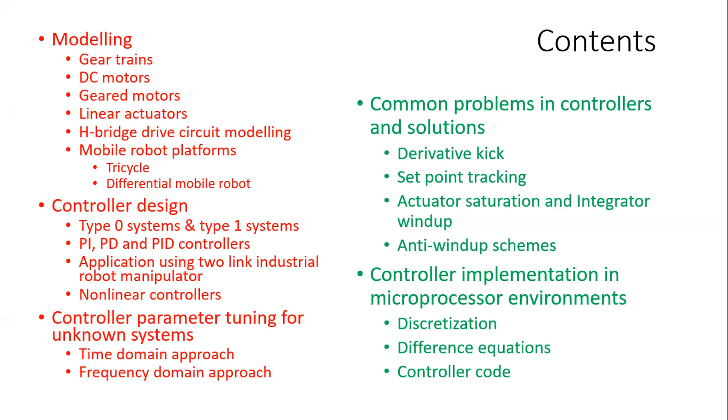Mostly these are DC motors, though sometimes you get stepper motors as well, and they come with a gear train. Why do we put a gear train? Motors are typically high-speed devices, whereas the motion profiles we need are smaller compared to the motor's speed. The motor may run at 1000 RPM, but what you want is 100 RPM or less. So you need a reduction gearbox to do that.

Putting in the reduction gearbox isn't the problem, but how do we incorporate that into the model if we want to control it precisely? I'm focusing not just on simple control, but on a more precise level of control.

Whatever complexity exists inside the gearbox, you have an input and an output. In between, you may have two gear wheels or many gear wheels. Those who have studied mechanical engineering will agree there are many sophisticated gear train arrangements, but whatever it is, it has one input shaft, one output shaft, and a gear ratio. So I'm talking about that kind of simple model, which is good enough.

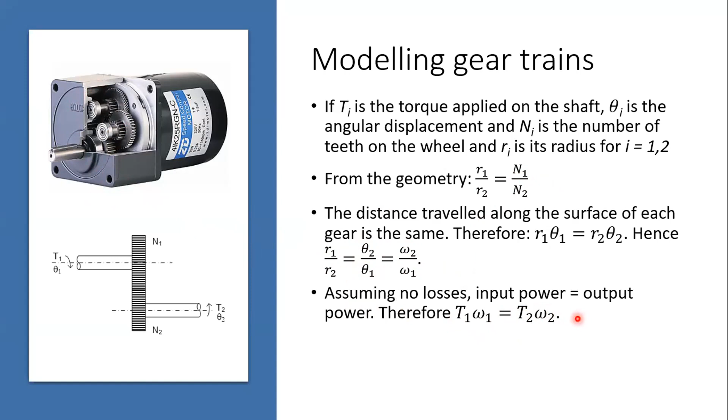In addition, if I assume this block is loss-free, input power—torque into speed—equals output power, again torque into speed. From that I can get the torque relationship. Practically this may not be exactly correct, but for modeling purposes it's accurate enough for us.

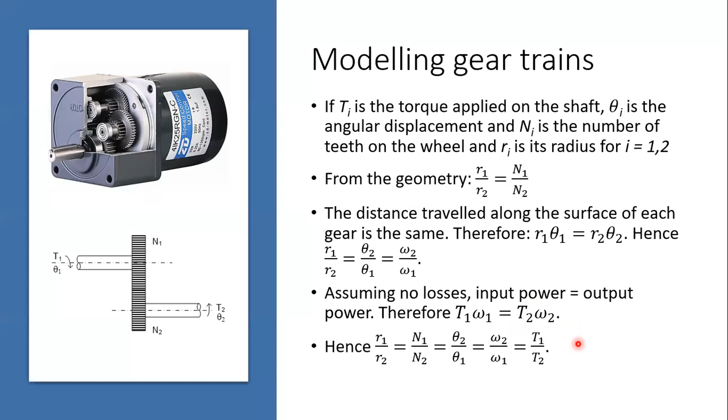So we simply combine these three equations—1, 2, and 3—into one long equation, which will be used for the modeling purpose.

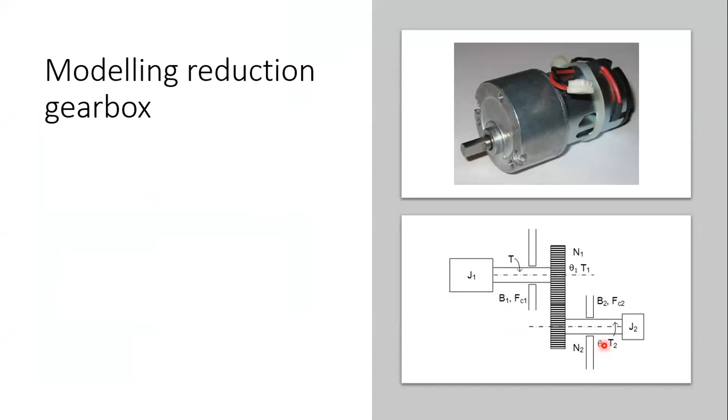So we can model these components consisting of the torque applied on the wheel. Here on this wheel it is T2, and this wheel it is T1. For T2, I can take the driving torque T2 minus the resistive torque from the viscous friction B2 dθ2 by dt, minus the Coulomb friction FC2 times angular speed divided by its modulus, so basically plus or minus 1, equal to the accelerating torque, that is J2 times d squared θ2 by dt squared. The same thing can be applied to the other wheel.

So if you do that, the torque applied by the motor minus the torque of the gear wheel, minus the resistive forces - this is the viscous friction torque, and this is the Coulomb friction torque - is equal to the inertia times the second derivative of the angle θ1.

So you can combine the torque relationship using this relation, and also the angle relationship as I showed earlier, and come up with this relationship: the torque in the electric motor is equal to the J equivalent times d squared θ1 by dt squared, plus B equivalent times dθ1 by dt, plus the Coulomb friction equivalent and the modulus, so this is either +1 or -1, where our equivalent values of inertia are n1 over n2 squared times J2, and here n1 over n2 squared times B2, and here n1 over n2.

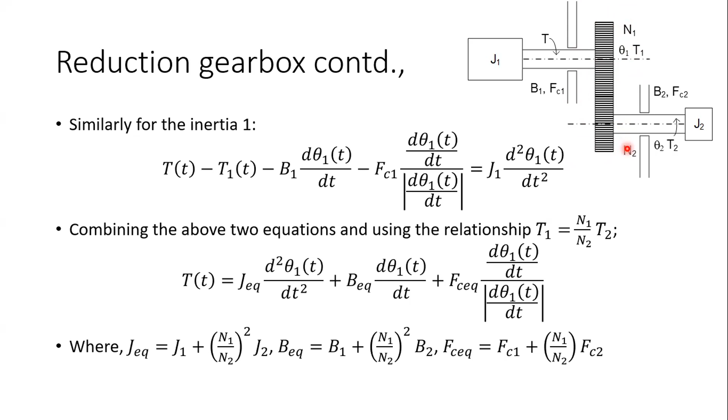Then how do we drive this gear? It's always connected to a motor, which I have shown earlier. Now, what do we get inside the motor? I am focusing only on DC motors because this is not the forum to talk about advanced motor details. In a DC motor, you have two terminals to supply the direct current, and then you get the brushes. Brushes are connected to the commutator, and the commutator bars are connected to the windings of the armature, and then the armature rotates in a magnetic field.

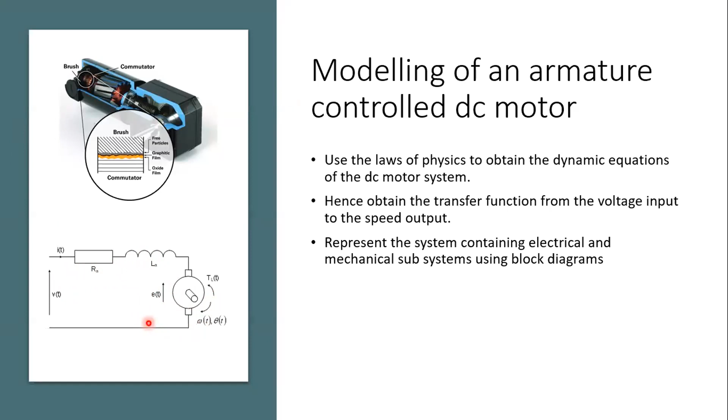Most of the time, 99.9% of the time, motors used in robotics obtain their magnetic field through permanent magnets, so basically you have a constant field in the motor. Therefore, you can represent the motor by this simple model, where RA is the armature resistance, LA is the armature inductance, and you have a back electromotive force which comes into effect when the motor turns under a flux. So with that, we can apply a simple model.

And these are the model equations. The applied voltage is equal to the resistive voltage drop plus the drop across the inductors, that is L times dIA by dt, plus the back electromotive force. If you take the Laplace transform of this, you get V of S minus EA of S, that is back EMF, over RA plus LA S, is the current. And in the time domain, your back electromotive force is proportional to the speed, and the constant of proportionality is KE.

In these machines that you work with in robotics, we have a constant field, therefore this KE is constant. Otherwise, this can be different, depending on the motor arrangement, but in robotics you can take that as a constant. If you refer to a data sheet, sometimes this is given as volts per RPM - most of the time, data sheets refer to this in volts per RPM. So you have to be careful, because RPM is not an SI unit - you have to convert that into radians per second. These little things people forget, and end up with wrong calculations where ultimately your controller doesn't work.

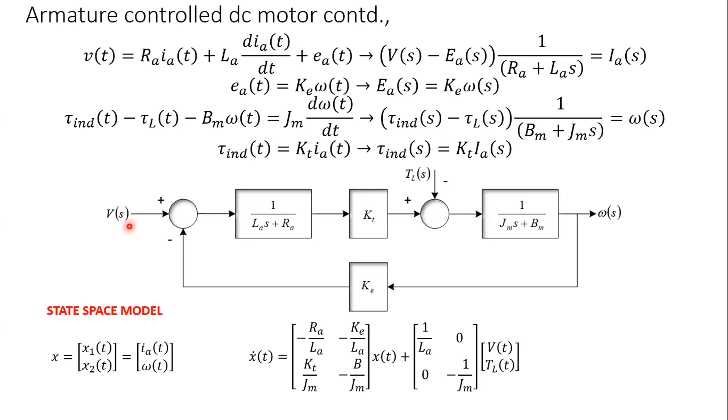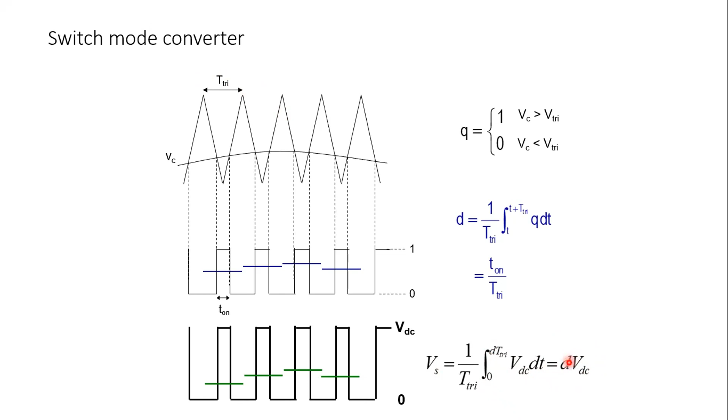So let's get into the small signal model of that. The idea is when we change the control voltage.

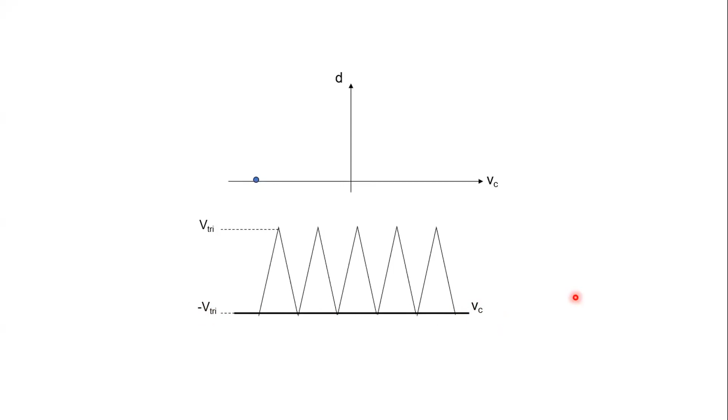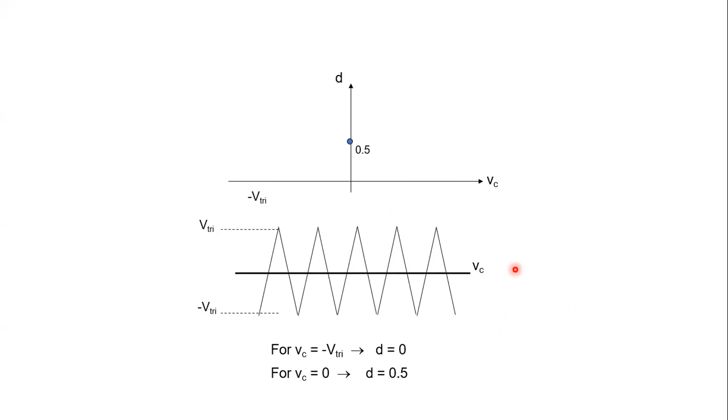This is the scenario when the control voltage is at minus triangular voltage, we get duty ratio 0. If we increase to the midpoint between minus V triangle and plus V triangle, the duty ratio becomes 0.5, and if it is at plus V triangle, it becomes 1.

This is a simple y equals mx plus c type equation. So your y is the d, the duty ratio, that is equal to the gradient, which is 1 divided by 2 times V triangle, times VC, plus the intercept, which is 0.5. So this is the duty equation against VC.

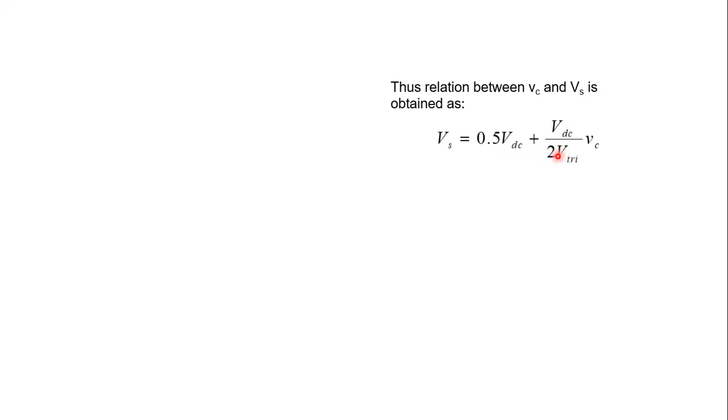So we have a mapping from VC to D. Now we need to convert this into the voltage. The supply voltage is 0.5 times VDC plus VDC over 2 times V triangle times VC.

Now this is the DC model. We need to apply a perturbation, that is a small change in VC and a small change in VS. That's the perturbed version. Subtracting the DC will give us the small signal model. So the small signal model is: the supplied voltage equals VDC over 2 times V triangle, times the control voltage. Now we have a model such that our input is the control voltage, calculated by the controller, which gets translated into the supply voltage through this relationship.

Now this is the battery or the VCC of your power supply, and this is two times the triangular waveform used in the power electronics. We need to know these two parameters to determine how much voltage is applied on the motor. This is determined by the controller. So the transfer function, therefore, is VS over VC equals VDC over 2 times the triangular waveform.

Now, there is one point here in the calculations. We assume that the voltage is from 0 to VDC. So the model here is VDC over 2 times V triangle. In order to relax that assumption—for example, the motor we considered with a single leg cannot be reversed, but in robotics, we need to reverse it.

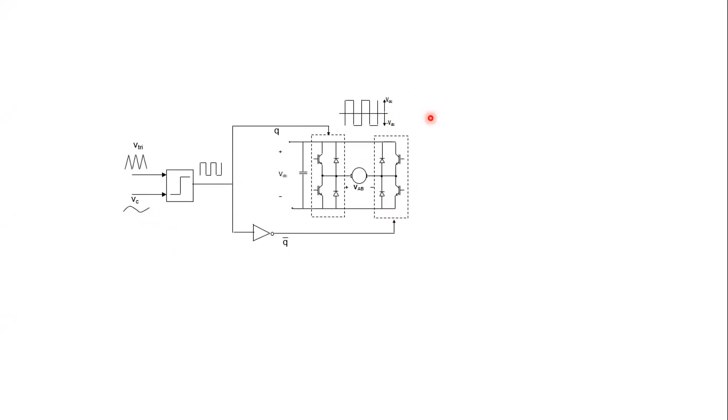Again, the duty ratio, the DC equation we can write like this from our earlier derivation. For the other leg, it should be 1 minus dA, so it is this one. You can take the voltage at this point as VA and voltage at this point as VB. So what matters is the voltage applied on the terminal of the motor, which is VA minus VB. VA minus VB in this case is VDC over V triangle times the control voltage.

Now there is a slight difference: the 2 is missing in this case. So when you have bipolar, you have only 1 as the coefficient there. So there is a slight difference, that you get it without the 2.

Whatever it is, now you have to note the fact that the model is different, and it needs this voltage, which you need to extract from the data sheet of the drive circuit. Also, when you change the supply voltage, you need to adjust this transfer function. It's not a complex transfer function—it doesn't introduce any poles or zeros, it's just a gain. But if you don't know the gain correctly, all your tuning will be wrong. That's why I am stressing on that.

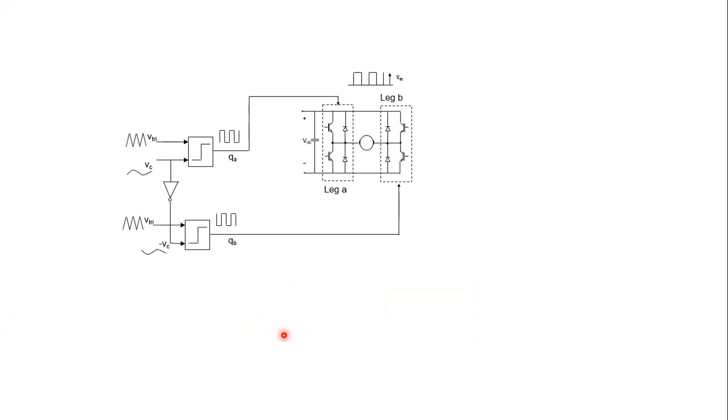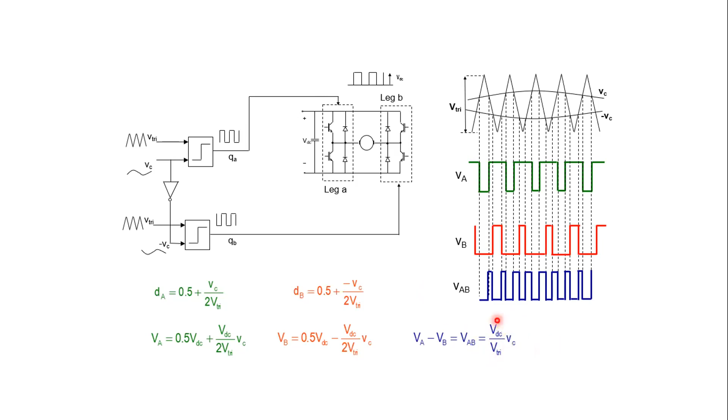So there's another arrangement for how you are doing this: instead of taking the inverse of the logic, you can take the control voltage and apply the inverse of the control voltage, and thereby drive the H-bridge in a slightly different manner, but even in that case, you end up with the same model transfer function as in the previous case.

Let me take this out, otherwise. Sorry.

So ultimately, the model remains VDC over V triangle. Then, how do we connect it to the power electronics? Can't I get rid of this? Anyway.

In addition, I may have to do some control. Probably I need to deliver a certain amount of torque or a certain speed or a particular angle, whatever it is - that becomes the outermost loop. So typically when you buy a drive circuit, you are given those options.

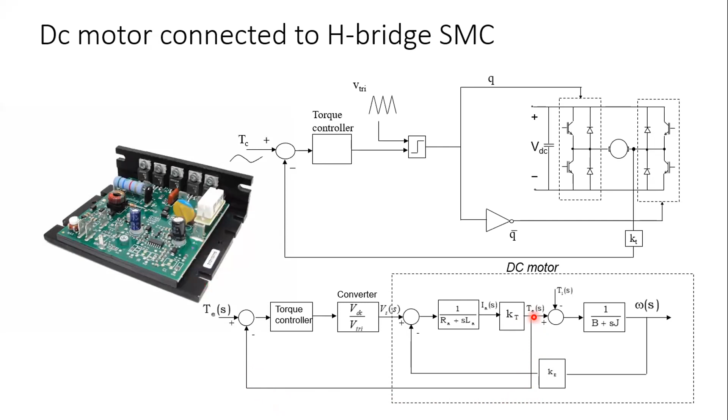If you want to implement torque control, then you need some idea about the torque, which is typically done using the current relationship, because torque produced is proportional to current. If you know the constant of proportionality, and you measure the current, you get an idea how much torque is produced. So you get the torque feedback, and this is the torque reference. You calculate the torque error, which is fed into a torque controller that provides the control signal for the converter. So that is one end of the application.

And then you can do the same thing for speed, because in that case, you need to look at the back electromotive force, for example. From that, you can calculate the speed - back EMF is a voltage, and then you calculate the speed. Or else you can put a speed sensor here, and from the speed sensor you can measure what the speed is, which I have shown in the next slide.

Before moving to the next slide, this is the kind of electronics you probably get in a drive circuit. If you open one up, you get power electronic switches dealing with these parts, and then you have big resistors to dissipate whatever heat is regenerated, because most of the time when you decelerate, some amount of energy is fed back into the source. So these motors don't expect you to operate in all 4 quadrants. Instead, the energy released there is just burnt as heat.

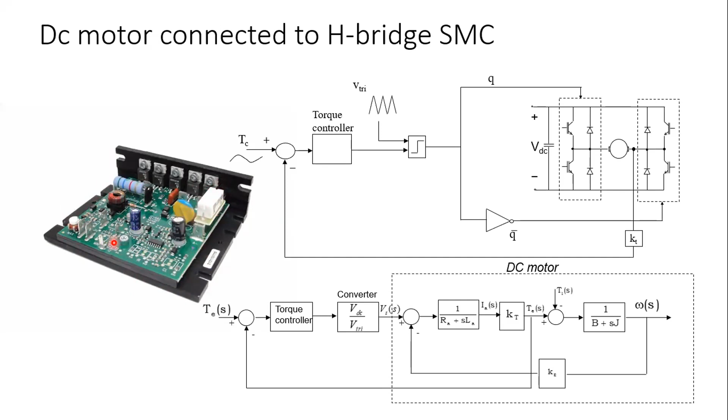In the next slide, I will show you how this can be applied for speed control. There we measure the speed and compare it with the reference speed, and this is sent through a speed controller, which determines VC, the control voltage, which gets compared with the triangular waveform here. So this is how the DC motor is connected to the H bridge switch mode converter.

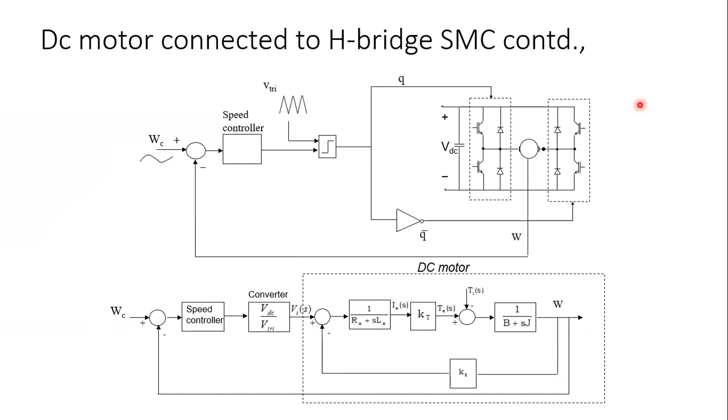Next, let me take you through a simple robotics application, which is another familiar platform where it has got 3 wheels, and it's not just a differential robot. I will come to the differential robot application in a short while. But what you get here is instead a driving wheel which does the steering as well, and these are free wheels. So this is a vehicle which can go in any direction.

There are advantages and disadvantages of this kind of platform if you use it. The advantage is you get 1 wheel less than a 4-wheeler, and also your maneuverability - it depends on how you design the rest of the system - could be higher because you can take certain large angles with very small radius.

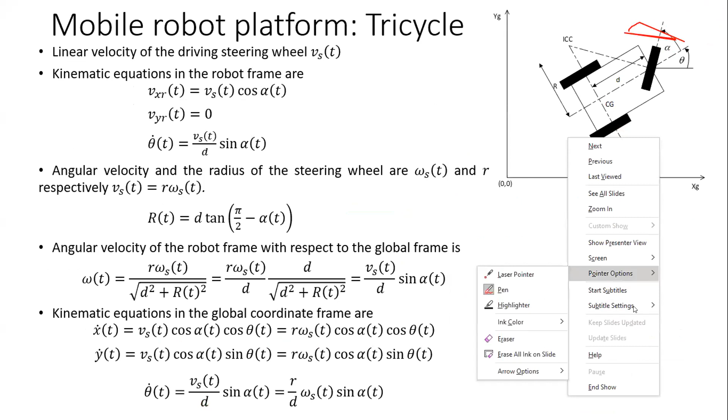Let me use the tool. Just move this wheel, move this wheel this way or the other, right? That is steering. But rotating around this axis is omega, right? So that is the difference.

And similarly, I can derive the angle alpha. So I know the desired speed of rotation of the front wheel and desired steering angle. Why I did all these derivations is to show you two interesting properties: that this problem is now a matter of controlling the speed of the front wheel, rotational speed, and the position of the steering. So the first one is a speed control problem, and the second one is a position control problem. So if I take the first one, what do we have? We have the front wheel.

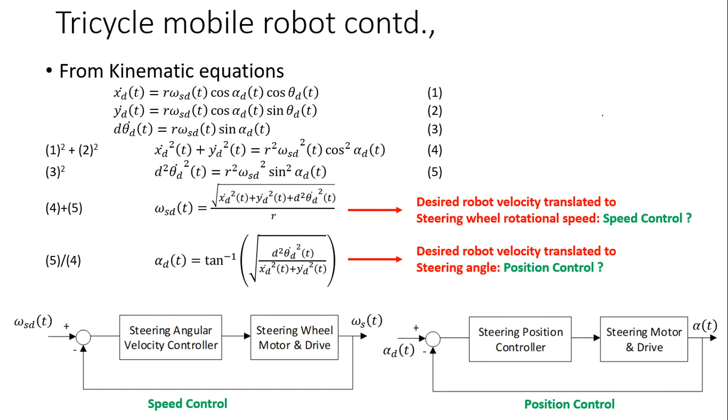Okay, before that, I would like to add this as well. That is another very familiar platform, which is the differential robot.

I think if you do robotics, especially mobile robotics, this is the point where many of you start. Sometimes if you are not familiar with any of the control things, people start with stepper motors even, because that doesn't need any controller or there's no feedback.

I can remember in 2006 when I returned from the PhD, there were a couple of students, I still remember their names. They were coming after me asking how to drive this kind of a robot using stepper motors. So I think it was me who made them the motor drive circuit as well. Anyway, so that's history.

So what you have there, if you look at it from the modeling point of view, we have a robot and two wheels, and the wheels are driven by geared motors like this. There can be other arrangements, batteries, power electronics, etc., and all sorts of other sensors. So this is what we have.

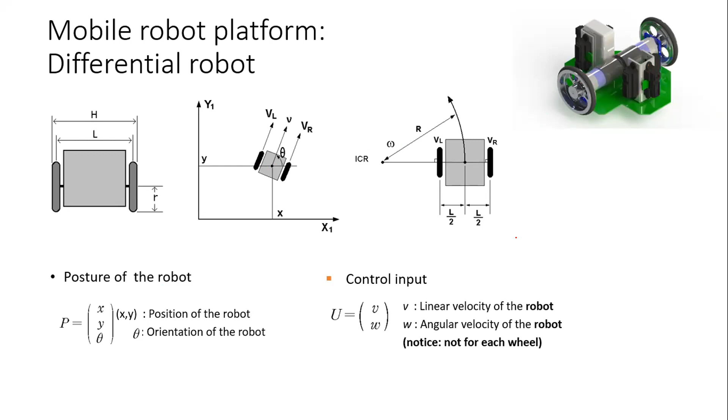So again here, the posture of the robot is determined by, even in the previous one, it is the same thing, x, theta, and y, and the control inputs are v and w. So you have the kinematic model. Before that, you can use the geometry also. Here again, the instantaneous center of rotation, ICC, is there, and depending on the radius and the fixed distance between the wheels, the right side wheel should have linear velocity given by r plus L by 2 times omega.

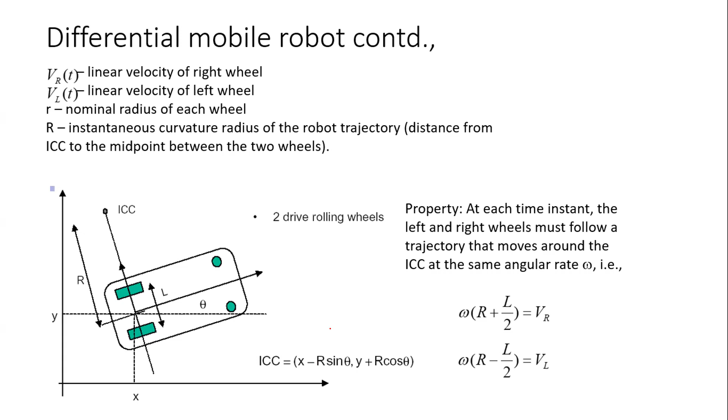Omega is the vehicle speed around an axis passing through ICC. Similarly, the left side speed should be omega times r, this is r minus L by 2 times omega. So the left side angular velocity of the wheel can be related to the left side linear velocity, and similarly the right side. From that you can derive omega as the linear velocity difference between the wheels divided by the distance between the wheels, and the velocity of the vehicle is the average velocity of these two. Then form the kinematic equation like this, and then there is a non-holonomic constraint, that is the vehicle can't move in this direction.

So if you put that condition, we can get another equation, and this is a bit of an analysis. So the radius, when the two velocities are equal, the radius goes to infinity. That means it is moving in a straight line. Otherwise, it will turn in one direction. So this is a very advantageous feature here, because for example, if you start rotating in the opposite direction, r becomes 0. That means it is turning around this one.

You don't need the steering for this. Just by turning the wheels in the opposite direction by the same velocity, you can turn the robot. So the turning radius is 0. That's one reason why this is preferred in many of the applications. Probably you have seen this monocycle. A modern version of that has been there, but it's not very popular anymore for different reasons.

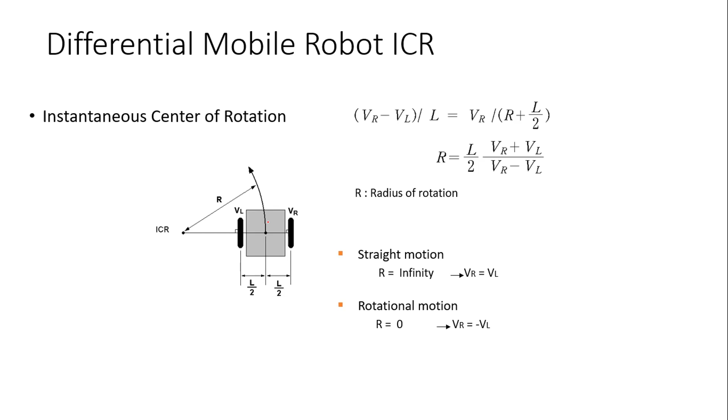So many of the applications you have this, and I'm sure you must have tried this one by yourself. So the model is this one. There again, we can write some equations. So here, we know that the left side velocity is r, the radius, times omega L, the radius of the wheel.

The right side also you can write like that. And the angular velocity around the axis passing through the instantaneous center of rotation is this, and the average velocity of the vehicle is given by that. So x direction velocity is v cos theta, and y direction is v sin theta, and theta dot is omega.

So here, from the global reference frame, we know the reference value for x dot, and we know the reference value for y dot, because we have been given a task in the computation. Okay, move the robot from this point A to point B in this velocity or in this time or whatever it is. So that is the thing that we know. So our variables, we need to translate into the domain where we can match them with the specifications. Otherwise, this guesswork will not work all the time. Might work, but it will not work all the time.

So we translate them in such a way that from these equations, we know that the square root of x dot squared plus y dot squared is v. If we know the reference speeds in x and y direction, we know the velocity reference. And theta dot reference is omega reference. You can take it like this. Then these reference values you translate into the velocities on the left-hand side and the right-hand side. This is the angular velocity of the right side wheel, and this is the angular velocity of the left side wheel. So if you have these two, then we know how to rotate the motor.

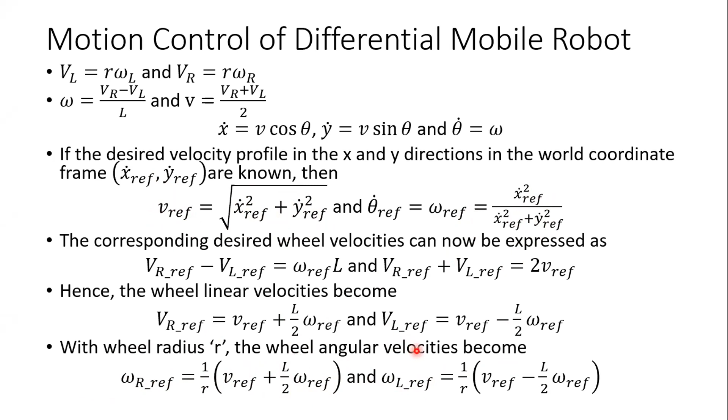So what we have seen so far is that the problem in hand is a simple velocity control problem in the differential robot case, and in the tricycle we have velocity control as well as position control. So let me apply known control theory into it.

Is it a question now? Okay.

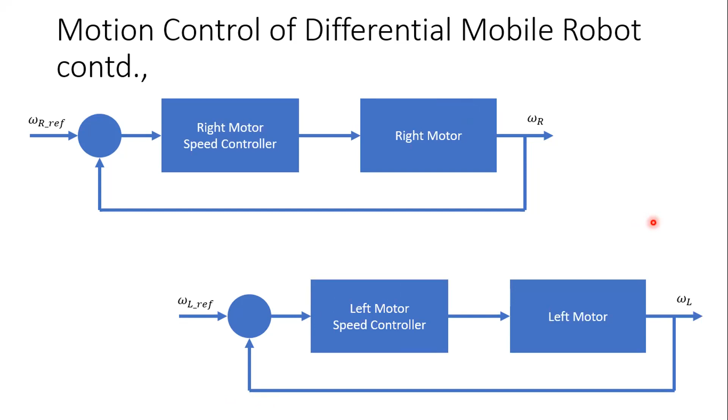So let us get back to the DC motor model. Now, with the mechanical part and the electrical part combined, you end up with a second order system that you can't avoid. So typically, it is a second order type 0 system.

If you do speed control, if you do position control, then another integration step adds, so it becomes a third order type 0 system — sorry, it should be type 1. And the important point here is sometimes this mechanical time constant, which is J over B, produces a much slower pole than the electrical time constant, which is L over R.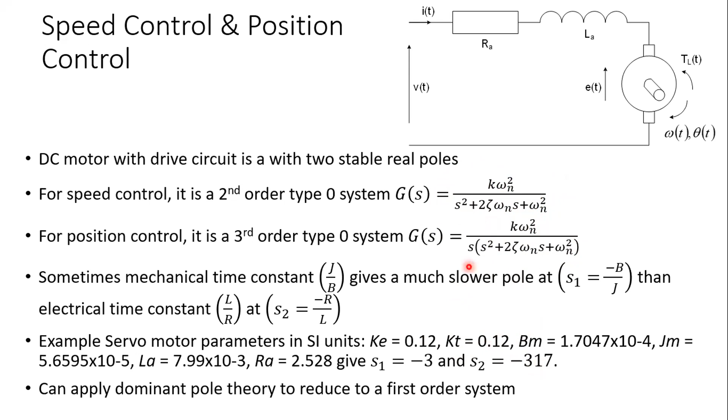But provided you can make this separation, and it works most of the time, especially for the motors that are in robotics, because they are meant to work like that. So the reduced one becomes a transfer function of this nature, and we want to do speed control of that.

Now we know from control theory that if you want to have zero steady state error for step input or higher order input, then we should have a type 1 system in the forward transfer function. That means GS should be type 1. From the plant equation, the reduced order one is a first order type 0 system, so you need to add an S. How do we do this addition of S?

You need a PI control. So when you add this PI controller, your GS-CS product is going to have a zero given by S equal to minus KI over KP, and you get a pole at S equal to 0, and another pole at S equal to minus 2 zeta omega n.

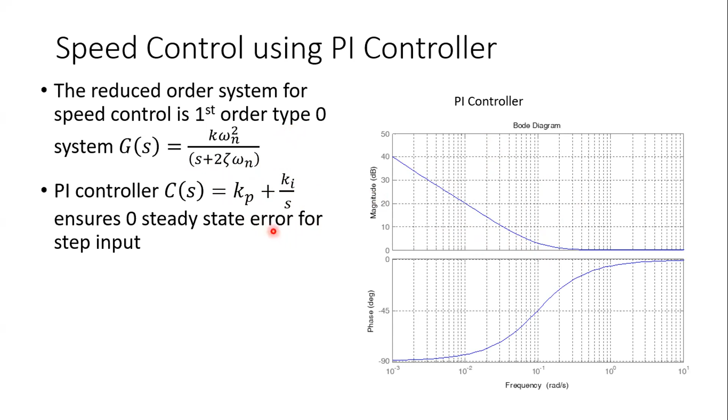So thereby you make sure that it is type 1. That is achieved through this Kp plus Ki over S, which is a low pass filter. And the next slide shows the influence of Kp and Ki on the controller behavior.

Now, when you increase Kp, you can see this is a low pass kind of filter, the PI controller, and the cutoff frequency goes down while the gain increases. The gain increases when you increase Kp, but at the same time the cutoff frequency goes down. And when you increase Ki, the cutoff frequency increases and the gain doesn't change. So this is how the parameters change.

So roughly, at least, you have to have this in mind when you apply a PI controller for speed control kind of application. You have to have an idea what is going on there, right? So this is about speed control.

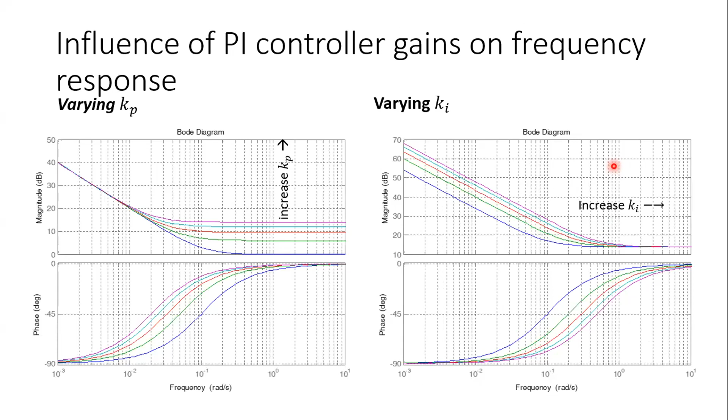Now, if I go to the other problem, which is position control. In the position control, the moment you call it position control, you have S here from the plant, right? That is because you put position measurement.

So there's no need that we add type 1 because it's already type 1. So there you add PD control. The position control we do using PD control.

But by nature, this controller is improper because the numerator power is higher than the denominator. So in order to solve that problem, we introduce this kind of an arrangement, where gamma is much less than 1.

So this is a comparison of PD and PD gamma controllers. We make sure that the additional pole has no significant influence on the rest of the operations, right? Whatever it is, the PD controller, you can see that it is a high pass filter. It allows high frequency stuff.

So the moment you introduce a PD controller, you add some more headache into the problem. That is, you bring in noise. The system becomes vulnerable to noise with the addition of the PD controller. Therefore, you have to make sure you do it correctly, right? So that's the practical side of it.

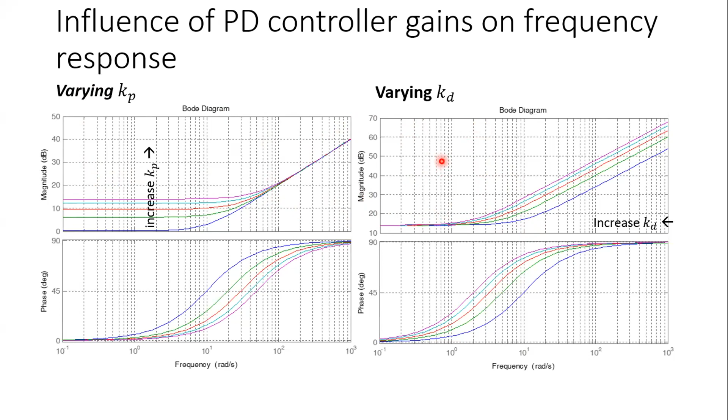There are different ways of doing this design, like pole zero cancellation, pole placement, and various things. But I am not going to cover all these things here. I am covering the essentials for robotics.

And especially another advantage of going for PD is you get the freedom to independently control the two profiles. Because most of the time, the problems that we get in robotics involve position reference as well as velocity reference, right? And the PD control...

allows us to, if you can put another sensor to measure the rate of change of angle or the velocity, then I can take that and use the Kd, the derivative part gain, to deal with it, where I completely eliminate the derivative term. But still, I am implementing PD control, because this time the D comes from here, from the reference and the measurement there. So I am not differentiating anything. I'm just taking the measurement and comparing it with the reference, right?

So that's another simple way of getting around many of the problems associated with PD control. You put the sensor, in addition to the angle sensor, you put an angular velocity sensor as well, and you take the profile from this one, for example.

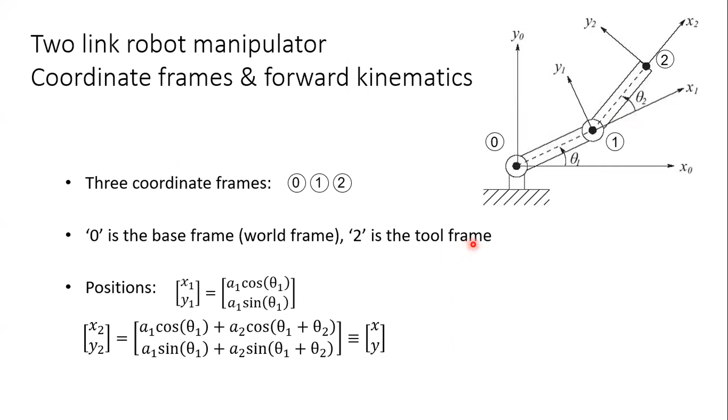That is basically, I express this in terms of the angles. And I can calculate the inverse kinematics, that is, given the position here, coordinates, I should be able to calculate what angles will ensure that I can reach there. So that is the inverse kinematics.

So you use the geometric relationships to come up with the angle theta 2, so the cos theta 2 is from the cosine formula. Cos theta 2 is, where x, y are the coordinates here, x squared plus y squared minus a1 squared minus a2 squared over 2 times a1 a2 gives me cos theta 2. That is this angle. So from that, if I take that as capital D, this you can calculate.

Given x and y, then from that I can calculate sine theta 2. From that I can calculate theta 2, and then I can calculate theta 1. Because I know this full angle, given that I know x and y, tan inverse of y over x is that full angle. And if I can reduce this bit, that means I know theta 1. So I can calculate basically theta 2 and theta 1 both.

So basically it shows me what are the angles that I should move this link and that link using the motors connected here in order to reach this coordinate x and y. So that's a problem, that problem has been simplified to that level. So again, it is a position control problem, which we have just learned. So the position controlling, you have the S in the forward transfer function, so there's no need of adding a PI controller there, just PD will do the job.

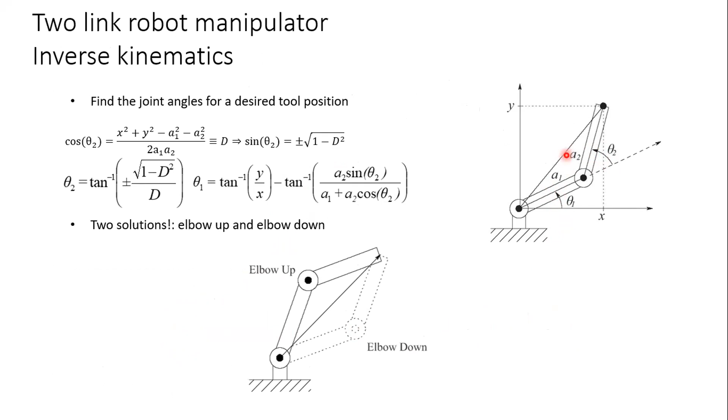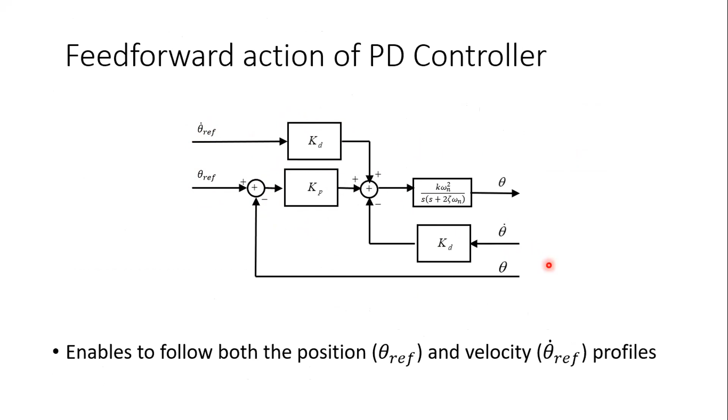So now I know the angle profile and the angular velocity profile. If I know both, then it is a matter of translating that into a controller, which I showed earlier. Now I know the desired angle and the desired angular velocity for joint 1 and joint 2. So implementing one PD controller for each joint will give me the desired profile. So that's the application of PD control in the industrial robot manipulator.

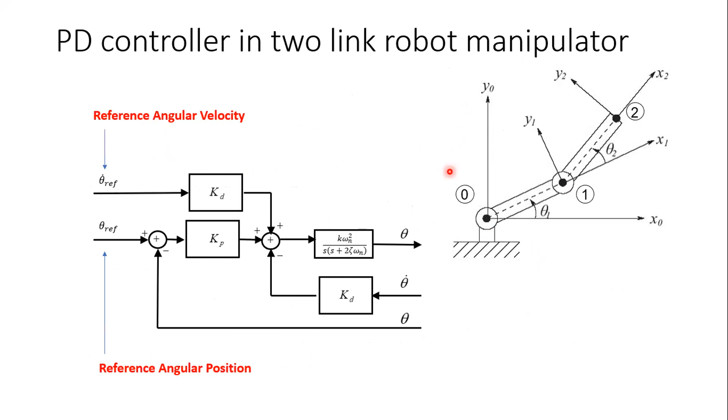I have given this in the next slide, so this is what I am expected to do with that. And also, if you have a nonlinear system, still this can be used.

And this type of controller we usually call inverse dynamic controller, because if you look at carefully, what you have is x double dot, this is the desired x double dot, the acceleration version. But here I get x tilde dot and x tilde. X tilde is the error, desired x minus actual x, that is the error.

Desired x velocity minus actual x velocity, that difference. This is not the time to give the derivation, but this is inverse dynamic control, which you can still use, and that has a PD architecture.

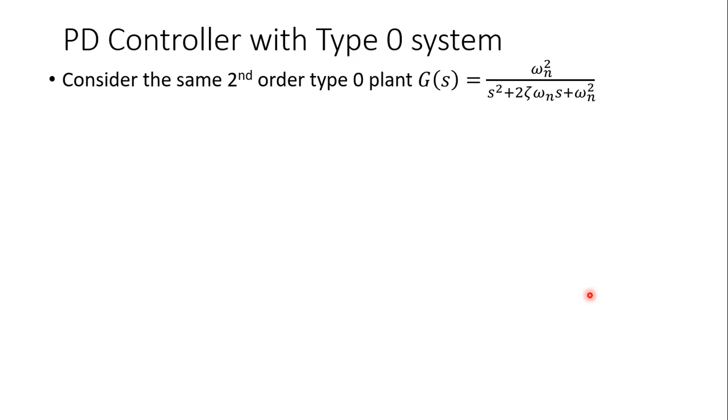Now I take you through a difficult part: what if we cannot reduce the system? All this time I was assuming that my two poles coming from the motor are far apart, so I can neglect the faster pole. If that's not the case, I am left with a second order type 0 system.

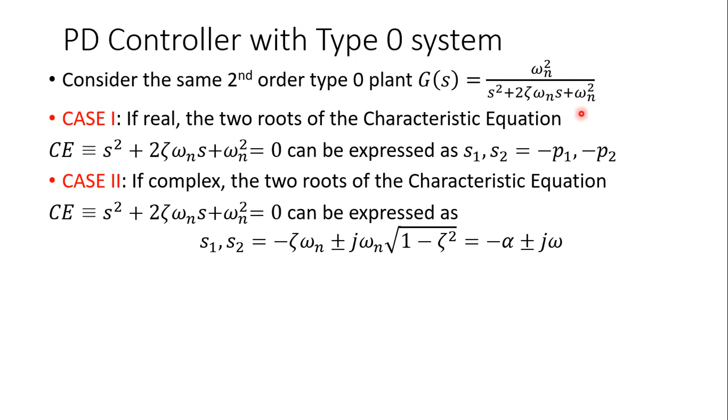If they have real roots, then probably I can do pole-zero cancellation. If it is complex, I can't use pole-zero cancellation unless I have a second order numerator in the controller, because with complex conjugate poles, I can't cancel just one. I have to cancel both, and to do that, I need a numerator which is second order.

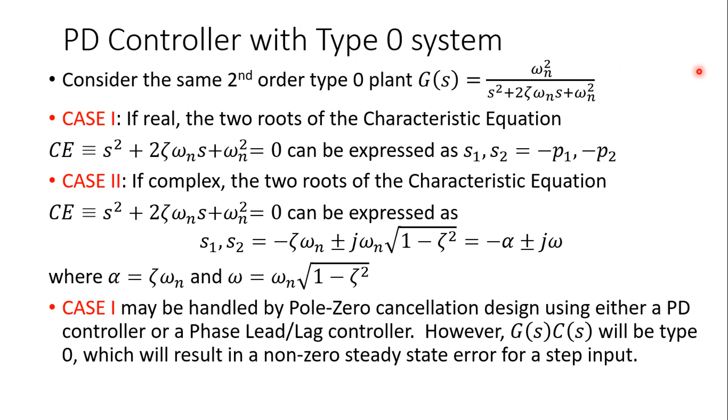How do we get that? In order to do that, we have PID control. I combine proportional, integral, and derivative and come up with the proportional integral derivative controller, which is, I would say, the workhorse in control engineering in industry. That has been there for decades.

Despite much research done all over the world in control systems, coming up with many new versions of controllers, control laws, theories, etc., still PID can challenge the performance of those new controllers with this 3-parameter controller: proportional gain, integral gain, and derivative gain. Of course, if you implement it correctly, otherwise it can lead to a disaster.

The additional advantage of this is that, even if you do pole-zero cancellation or not, you are introducing a pole at the origin. So you make your forward transfer function type 1, which gives you 0 steady state error. So that's a cool solution where you make sure your steady state error is 0 in addition to what you're trying to do.

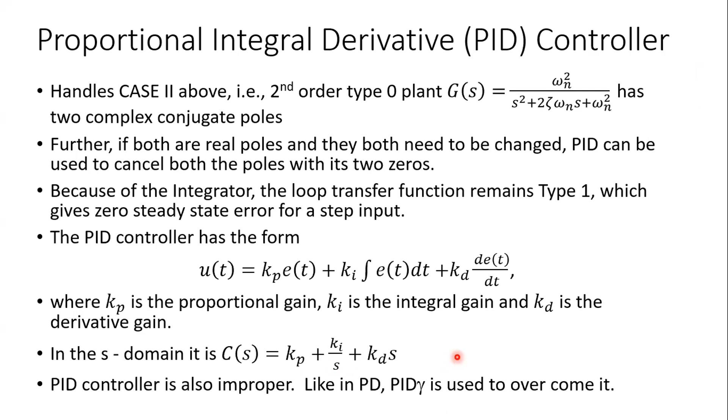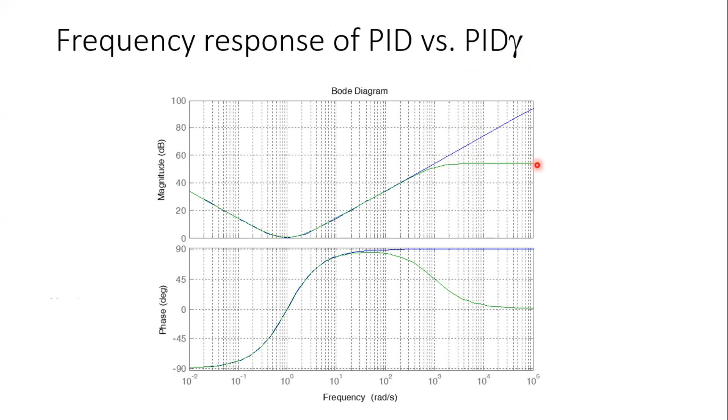So you have to apply the same trick as earlier. You apply the PID gamma. For the derivative part, you introduce the gamma and move it like that. And then this is how the variables, the parameters, are contributing.

When you increase it, ideally speaking, PID is a band-stop filter, and the gain increases when the bandwidth is increasing as Kp is increasing. This is the influence of Ki for the integral part, and that is the influence of Kd for the differential part.

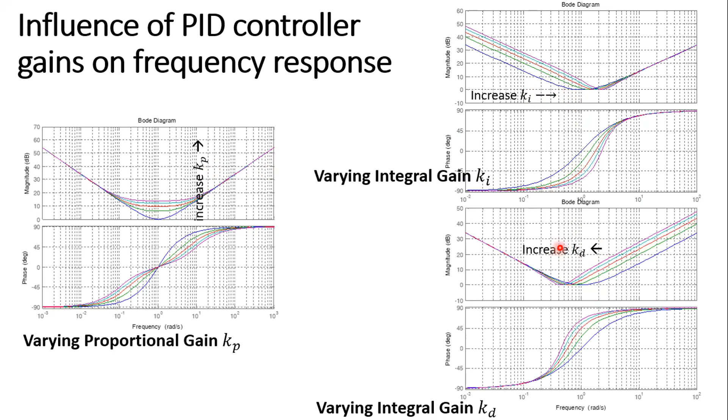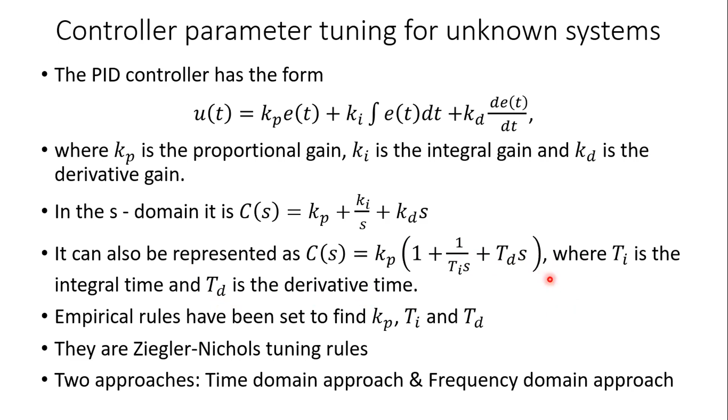There is another way of writing this down, which is useful in tuning the controller if you don't know the plant. That is, I rewrite the controller in terms of the integral time and the derivative time, Ti and Td. There are 2 ways to do the controller parameter tuning.

Ziegler-Nichols: these are empirical formulas derived through experience, and these tables give you, depending on what controller structure you have, how to select them. So what you do is take the open loop system, apply a step, look at the step response, put a tangent, and take the horizontal intercept and the vertical intercept, L and A respectively, and define the PID parameters accordingly.

Now, the Ziegler-Nichols tuning rules are just guidelines. It's a starting point; depending on the problem, you need to fine tune. I must tell you that this is the only place where you are officially allowed to fine tune, because this is an approximate way of doing things.

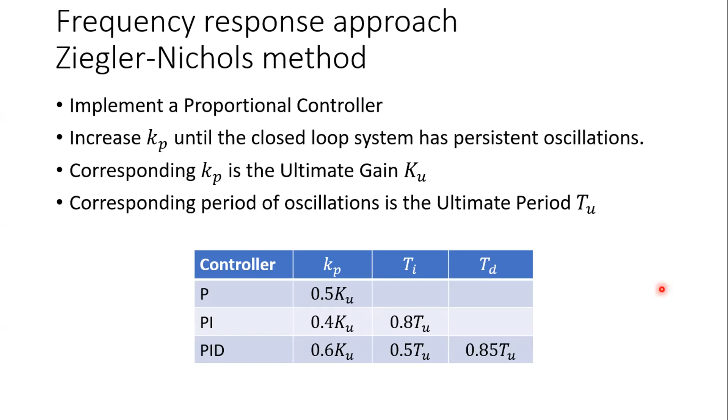The same thing can be done in the frequency domain. What you do is make sure your integrator and differentiator are not working. You only put a proportional controller and increase the gain until it starts oscillating. That gain you take as the ultimate gain, and the frequency or period of oscillations you take as the ultimate period, and you define the controller parameters in terms of these Ku and Tu. So this is another way that you can tune the controller parameters.

Now, whatever method you followed to find the controller tuning, the controller parameters, when you try to implement the PID or PD controllers, where you have the derivative part, you run into these problems.

One problem is this derivative kick, which is solely because of the differentiator. If you look carefully, what you are differentiating is the error, which is the reference minus the output. If you think about a step change in the reference, and the system was initially at standstill, then your output may be 0 just after giving the signal. So the reference, a large value, minus the output, a very small value, divided by even a tiny number, will give you a kick, which is called the derivative kick. For example, I will show you.

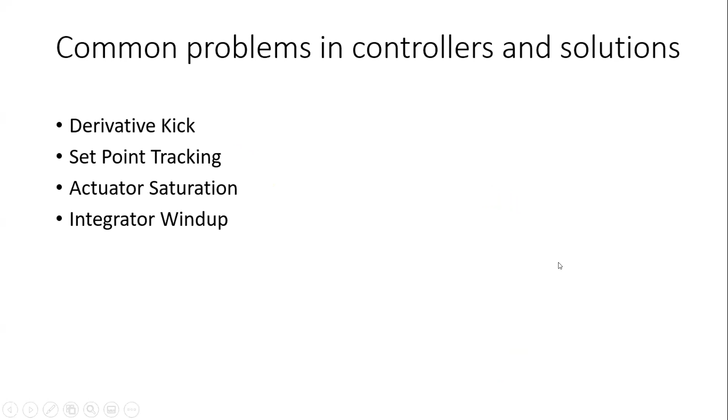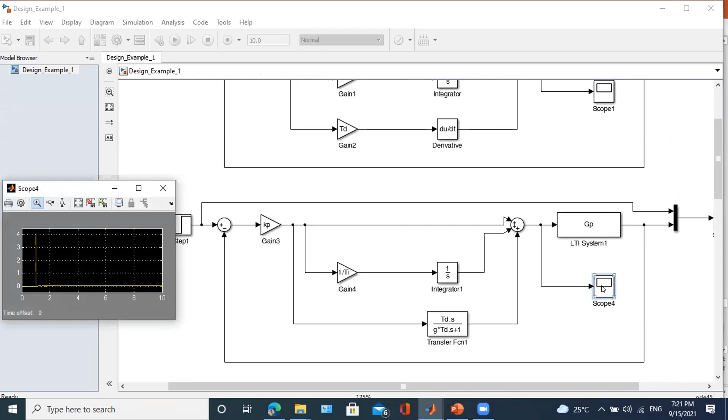What we mean by derivative kick is something like this. Typically, the control signal is in this region, but corresponding to a step change, you get this kind of a spike. That's the derivative kick.

Then another point is the set point tracking. Sometimes when you try to track the set points, you will get unnecessarily high overshoot.

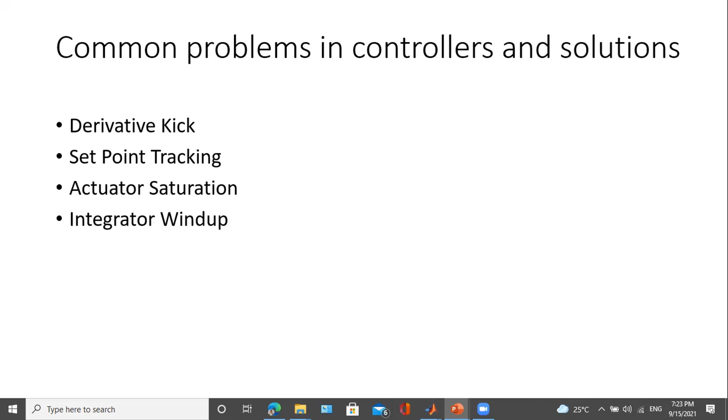Another problem is actuator saturation. Your motor has a particular input voltage beyond which it cannot accept, whether it is 12 volts, 24 volts, 48 volts, whatever. If your controller determines a voltage that's too high, for a 48 volt motor if it calculates 80 volts, that's not going to work. There are voltage limiters in your drive circuit that make sure nothing more than the power supply voltage is applied. So there is a difference between what the controller calculates and what is really applied. This increases the error between the reference and the output. If you do not correct that error, and you have an integrator in the loop, the integrator will keep counting up and up. That acts as a positive feedback, and it will start counting to infinity, making the saturation worse. We call that scenario integrator windup.

So let's take these one by one and introduce solutions.

For the derivative kick problem, you simply get rid of the error here and apply only the output. So even when you have step changes in the reference, it doesn't matter, it won't show up here because you are only putting in the output.

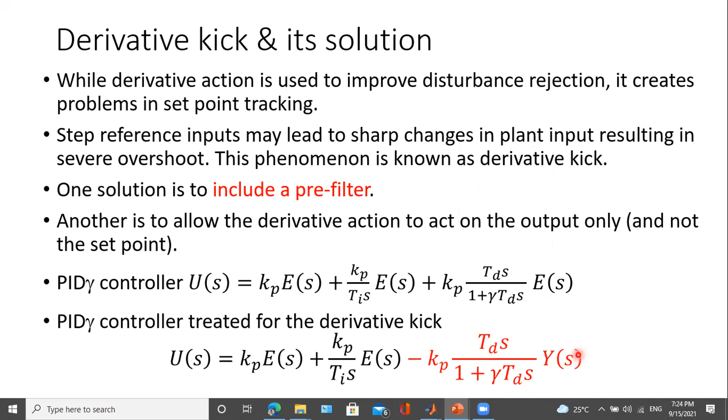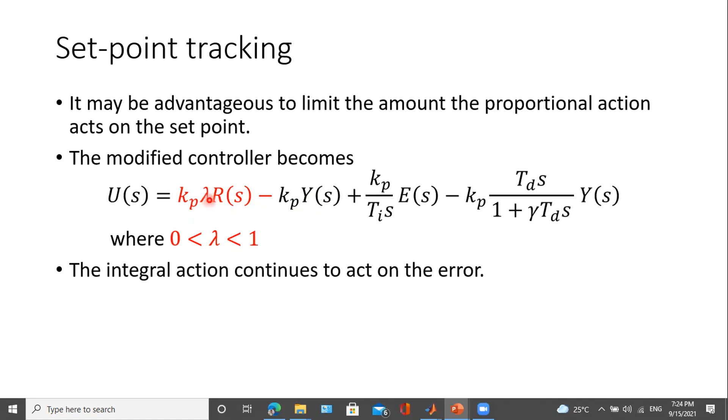Then for set point tracking, instead of putting the error into the proportional controller, you take a fraction lambda of the reference minus the output, where lambda is from 0 to 1.

Actuator saturation and integrator windup are combined. It's a problem which you cannot separate.

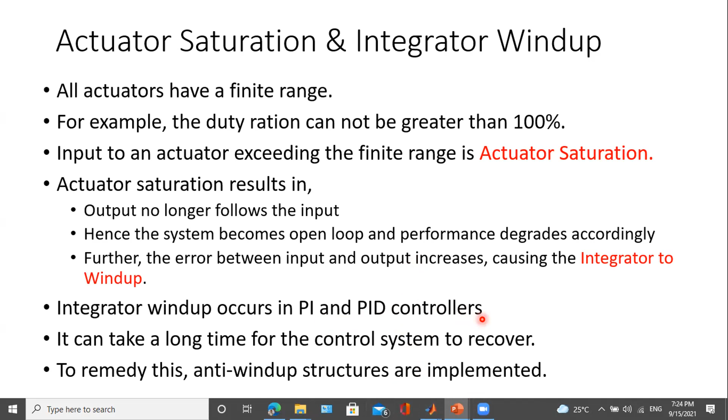So there are anti-windup structures if you can implement the controller in the discrete domain. For example, if you are implementing the controller in a microprocessor, then you have anti-windup schemes. Otherwise, if the controller is in analog electronics, you have to depend on a solution like this.

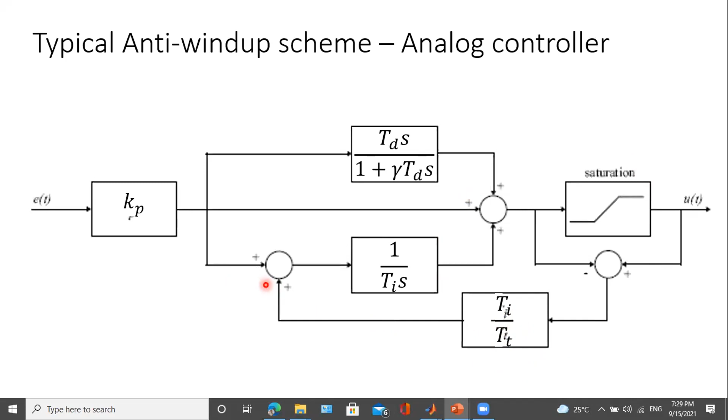Only thing you have to keep in mind is this kind of anti-windup scheme can be applied only if you are in the digital domain. If you are in the analog domain, you have to be happy with just one of these things. You still get a tuning parameter to deal with how fast you want to get it done, but it's just one parameter that you have to come up with.

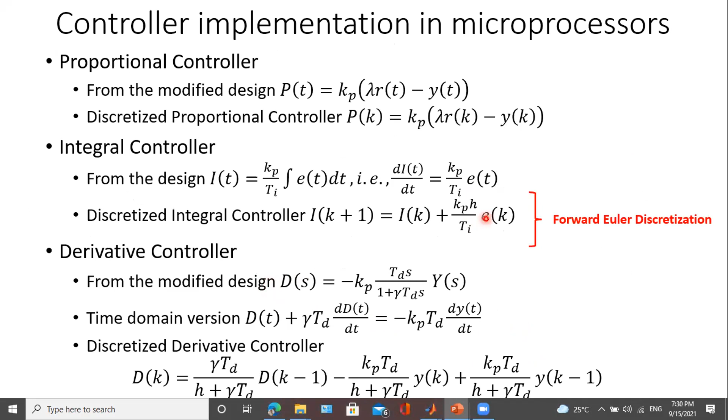So those are the implementation details, and that is what I plan to cover for today. I have taken 1.5 hours, I think that's good enough.

First, I must thank you for listening to me, and I'm happy to take questions if you have any.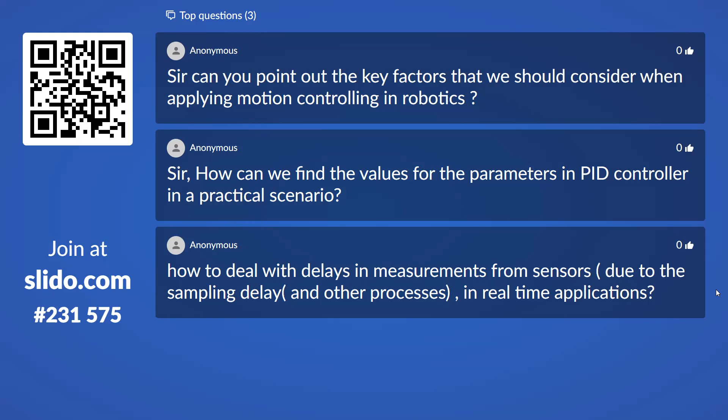Thank you sir. And the next question is, how can we find the values for the parameters in a PID controller in a practical scenario? Yeah, that's what I told you. You have to conduct a Ziegler-Nichols test. You apply a step, and I just showed you one step response.

Then you make the tangent and accordingly calculate L and A, and use the table to find the parameters. And of course, if you use Ziegler-Nichols, you can fine tune them afterwards. That is how you need to do it. You have to do one of them, otherwise it will not work.

The other method, of course, you can do the frequency-based approach. That is, you implement a proportional controller and increase the gain little by little until the output saturates or oscillates. That's the second test of Ziegler-Nichols.

You have to do one of them and then tune the PID parameters there. If you don't have any of those things, there are other practical ways of doing it. I mean, if I tell you...